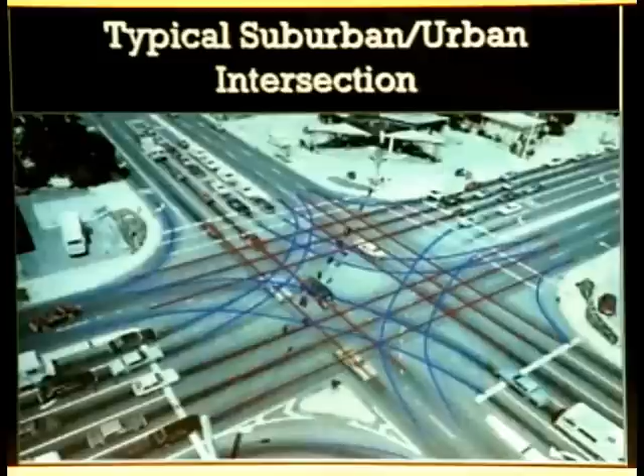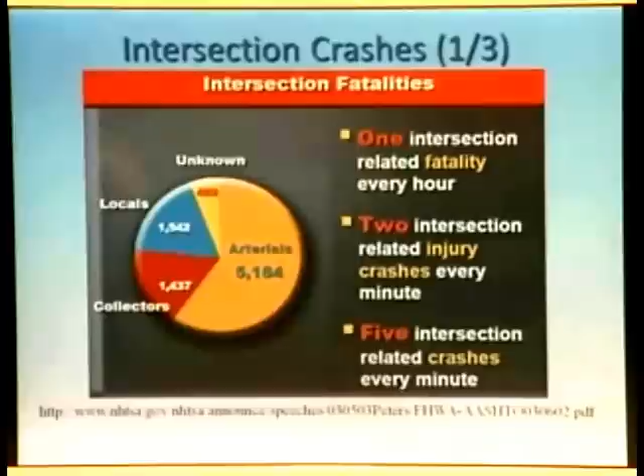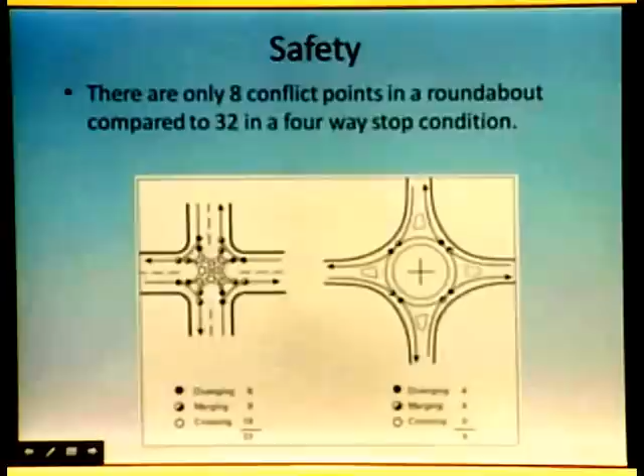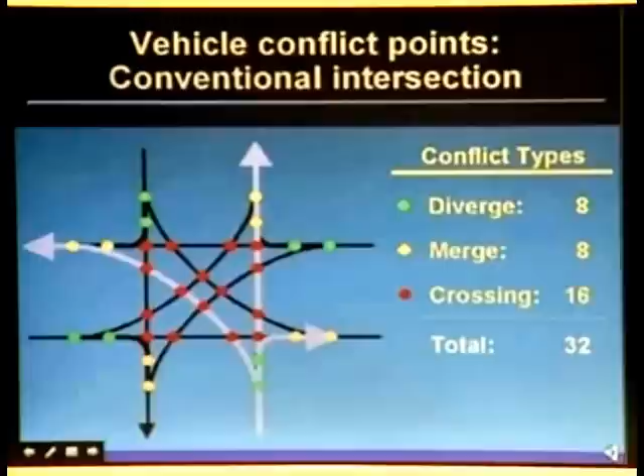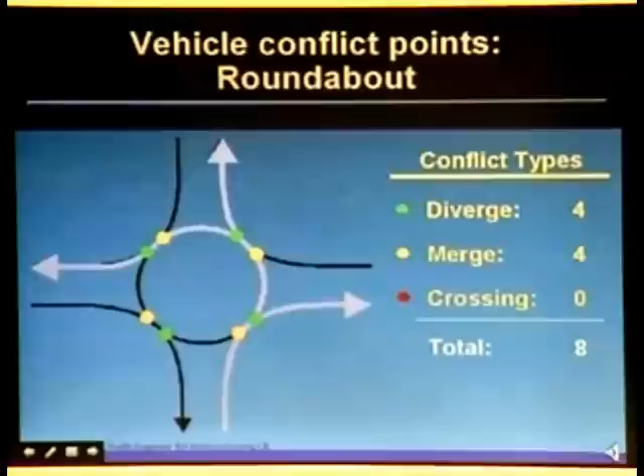Each 4-way stop intersection has 32 points of potential conflict for diverging, merging, and crossing traffic, while crossing a roundabout has only 8. The vehicle conflict points are what we're interested in. Note, look closer, the red shows that there are 16 potential points of crossing traffic in a regular intersection. If you go to the next slide, you'll see what we're talking about with roundabouts, and there are no crossing points of traffic compared to the 16 crossing points at a regular intersection. This is inherently safer.

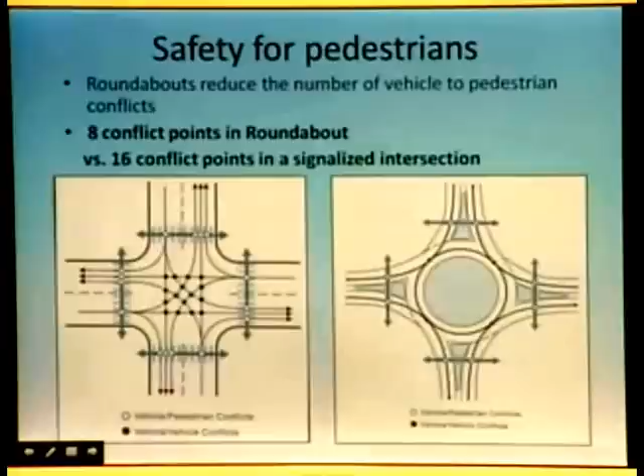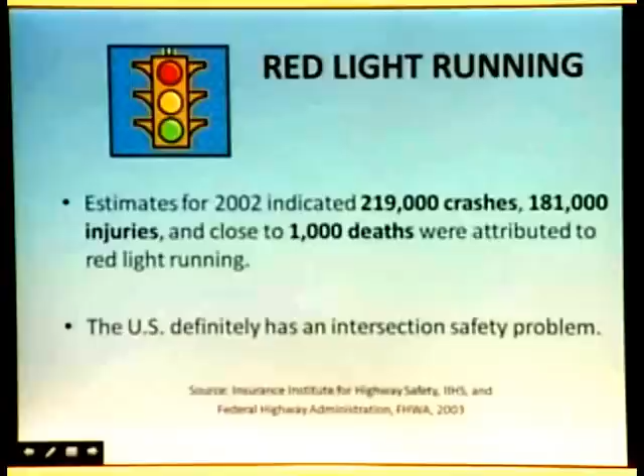It's also safer for pedestrians. At the traditional intersection, you have to look all 4 ways for traffic. At the roundabout, if you're walking across one of the legs of the roundabout, you need to look 2 ways, and you've got a chance to get across. And of course, one of the things that's kind of in Sarasota is red lights. Red light running is a very real problem in Sarasota. Sarasota definitely has an intersection safety problem on US 41. This is a serious issue both in Sarasota and across the country.

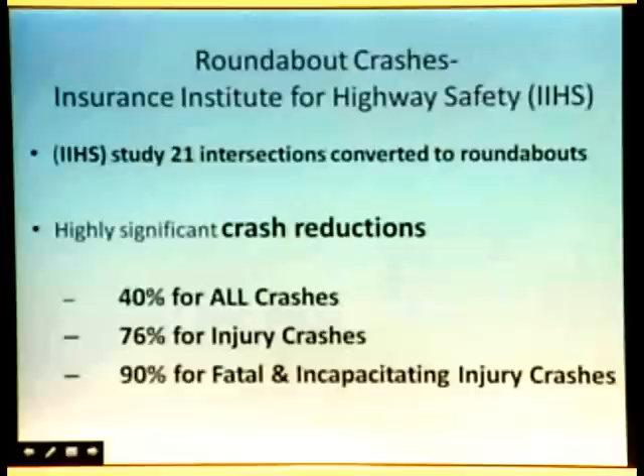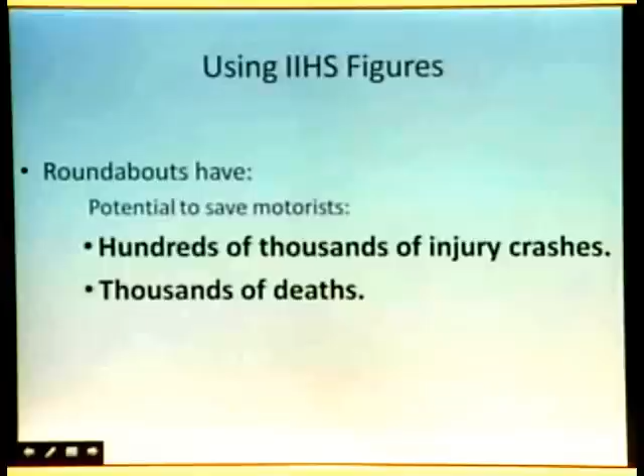So, with roundabouts, what happens? According to the Insurance Institute for Highway Safety, based on previous experience where intersections have been converted to roundabouts, there have been highly significant crash reductions. A 40% reduction on all crashes, 76% in injury crashes, and a 90% reduction in fatal crashes. Using the Insurance Institute for Highway Safety figures, roundabouts have the potential to save motorists hundreds of thousands of injury crashes and thousands of deaths.

Research presented at the 2005 annual National Roundabout Conference, sponsored by the Transportation Research Board and the National Academy, demonstrates the significant reduction in the number of accidents after roundabouts were installed at selected traditional intersections. One of the things, of course, also is speed. Roundabouts slow speed. And this graphic relates vehicular speed to the percentage chance of death of a pedestrian. Notice how the chance of death increases to almost 90% at a 40-mile-an-hour impact speed. It emphasizes the importance of lower speed for a safer pedestrian environment.

So why is this project a good idea? Well, for several reasons. It's safer, there are fewer accidents, fewer injuries, fewer severe injuries. It's quicker. Time saved from waiting on traffic lights puts cars significantly further down the road, even at slower speeds. It's quieter, there's noise reduction due to slower traffic. It's cleaner, there's less carbon emission from standing traffic. It's greener, less use of fuel waiting for traffic lights, and it's cheaper. It costs less than maintaining the traffic lights and the electricity, and you can run them even in a hurricane because you don't have to worry if you have electricity.

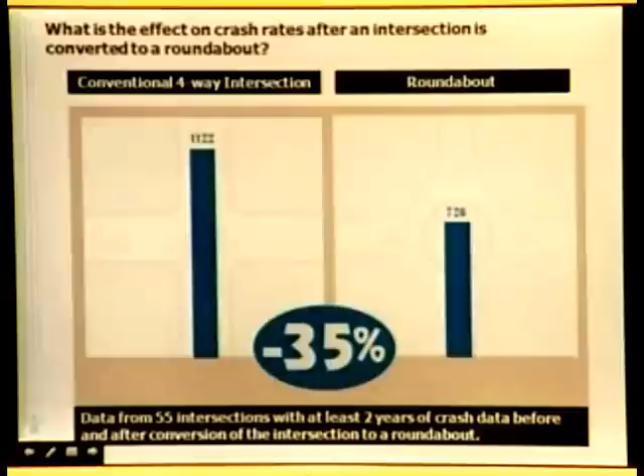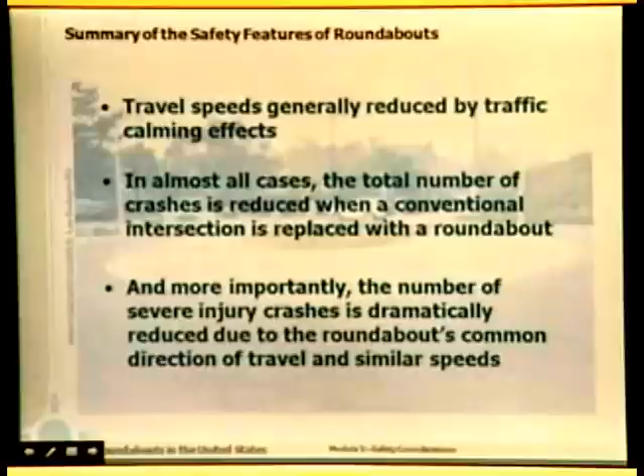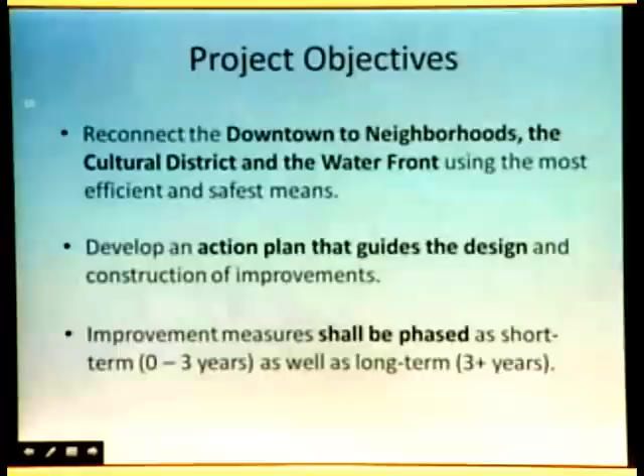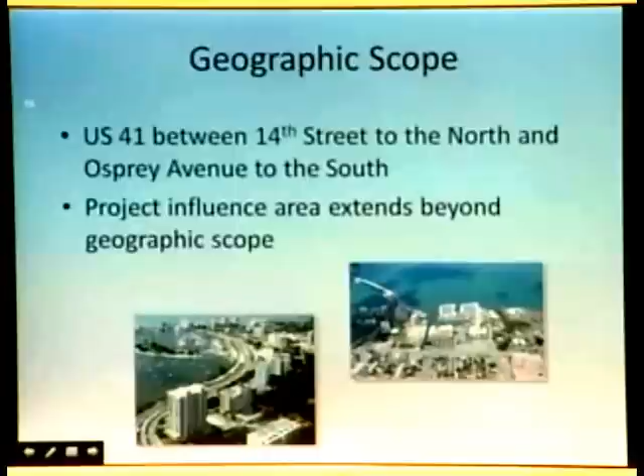So this is what's proposed: to reconnect the downtown to neighborhoods, the cultural district and the waterfront, using the efficient and safest means, and develop an action plan that guides the design and construction improvement, and they have two phases, short-term and long-term. The geographic scope is between 14th Street to the north and Osprey Avenue to the south. The other aspect of this is that this will have significant implications for the entire city.